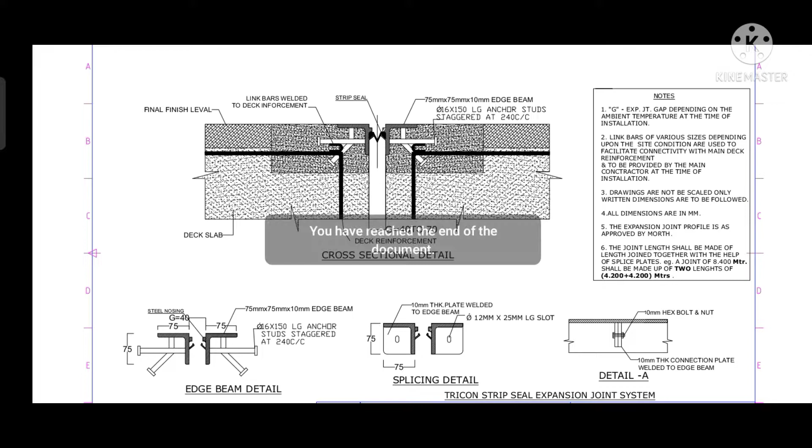In this video, I will show you how to install a strip seal expansion joint on a bridge. This joint must protect the concrete edge from damage caused by vehicle traffic. It also absorbs thermal expansion or thermal contraction.

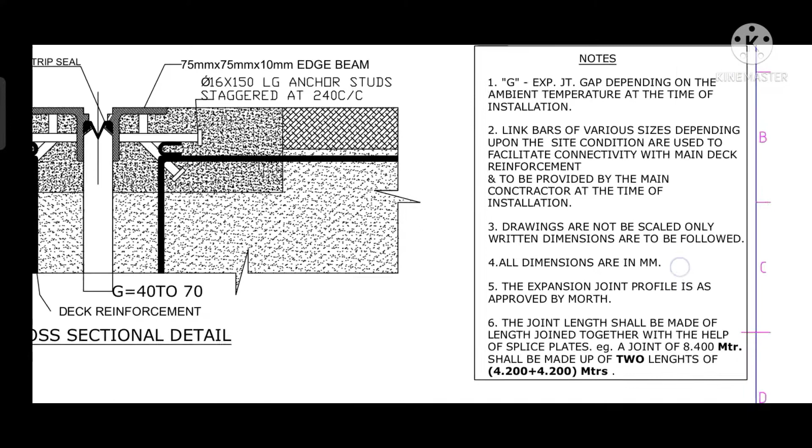First of all, I would like to introduce the drawing. First, the notes. The first note is about the expansion joint gap depending on temperature. When installing this joint, we had between 40 to 70 mm gap, which changes

as per temperature condition on site. The second note is about the link bar, whose size varies depending on the deck slab reinforcement, and the joint link bar distance changes based on site conditions. Other notes include instructions like dimensions, scale, MoRTH code, and others.

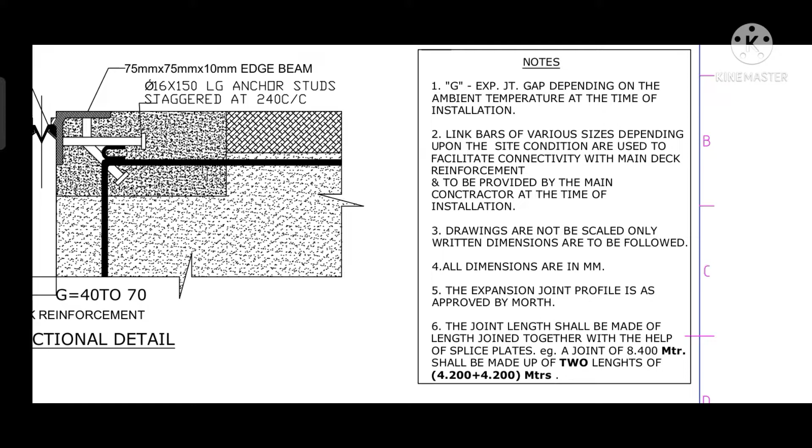After all that, we will see the cross section of the joint, where we can easily see the actual condition on site. Look at this, this is the cross section of the joint.

Right now we can see the gap between the joint is 40 to 70 mm. Also given is the deck's reinforcement position, so already we set the joint. The joint edge beam thickness is 10 mm, and length and width is 75 mm. You can see this in the drawing.

Link bar is welded to deck reinforcement, which will be shown in the middle of the video. Also we can see our joint is 75 mm above the slab level. Look, this is the drawing condition.

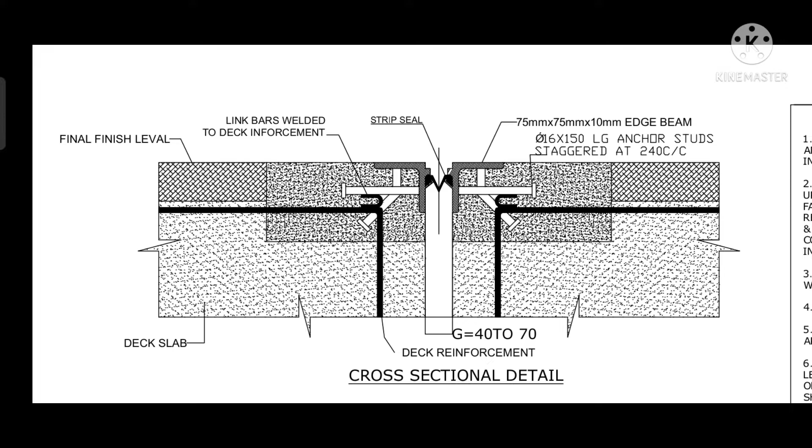After we complete the joint, we put in the strip seal, as given in the drawing. These are the drawing instructions. I will show you on this side how I can put in the joint. Okay, now we see the drawings below of the cross section.

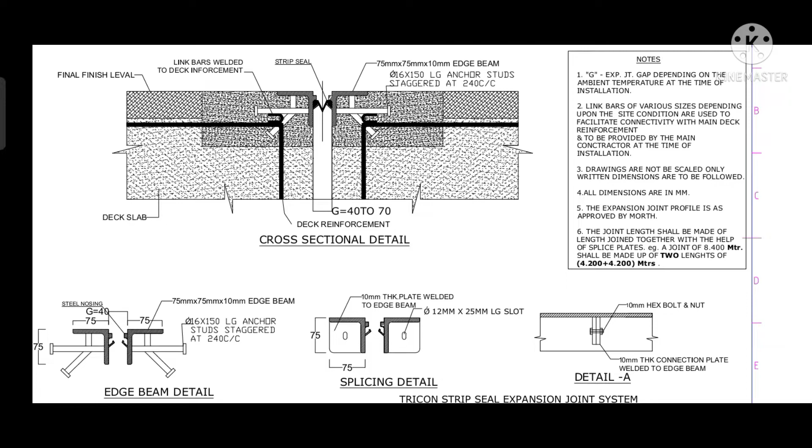Look, this gives the splicing detail, which shows the edge of the beam and the condition of the joint, thickness of the plate, and welded connection, given in the splicing detail. Also detail A is given for the bolted connection between two joints.

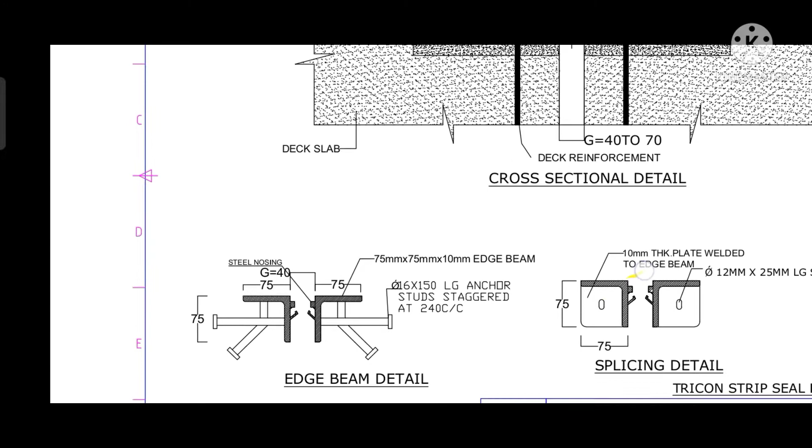Then we can see the edge beam detail. The edge beam detail gives the steel nosing and edge beam dimension, also the anchor size is given in the drawing. Also you can see the stud staggered at 240 mm center-to-center spacing.

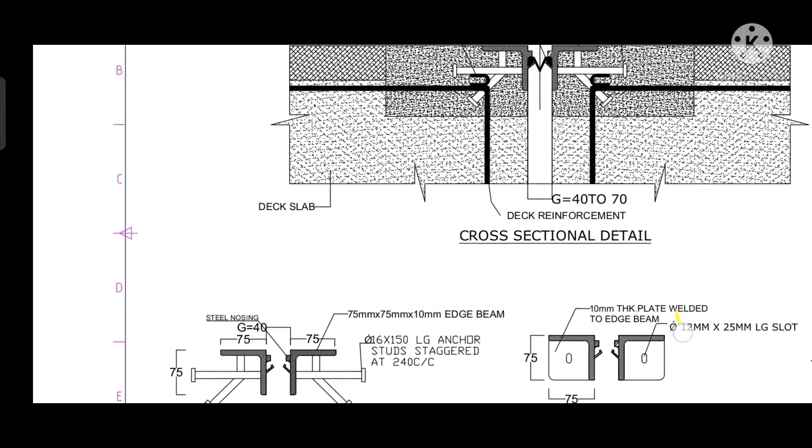Also, in this joint, the total quantity used is 38 numbers. After all, we have the plan and section of the joint, and we can see the length and joining of the two joints by bolted connection, given in this section.

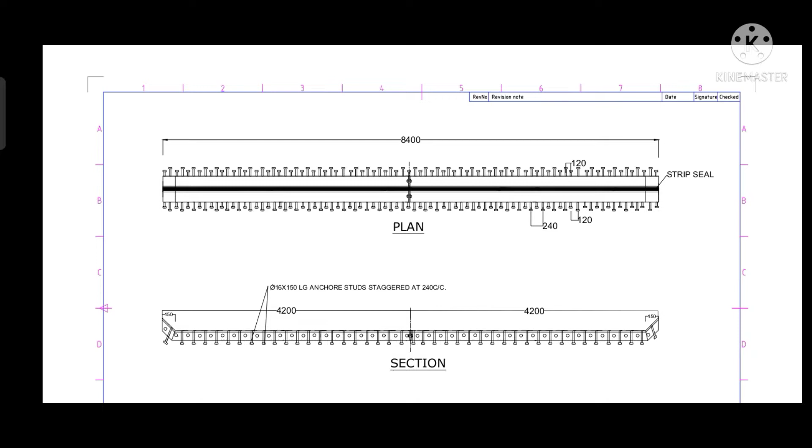Two straight anchor bar spacing is 240 mm and inclined strut anchor bar spacing is 120 mm. Also the dimension of the anchor bar is 16 mm. You can see this in the drawing section below.

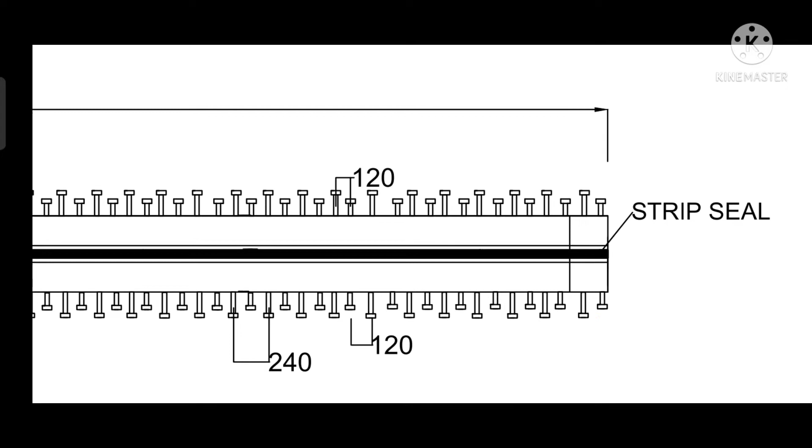Okay, that's it, our theoretical knowledge is over. We will go to the site, which is more interesting. Look, these are our joints, and I will introduce the whole process of it.

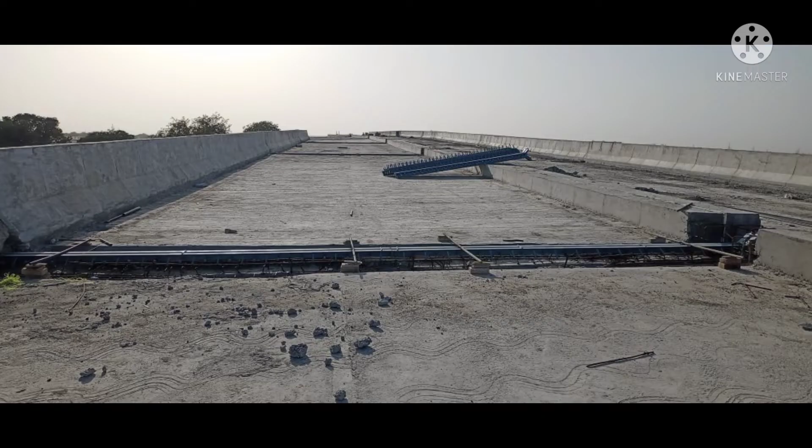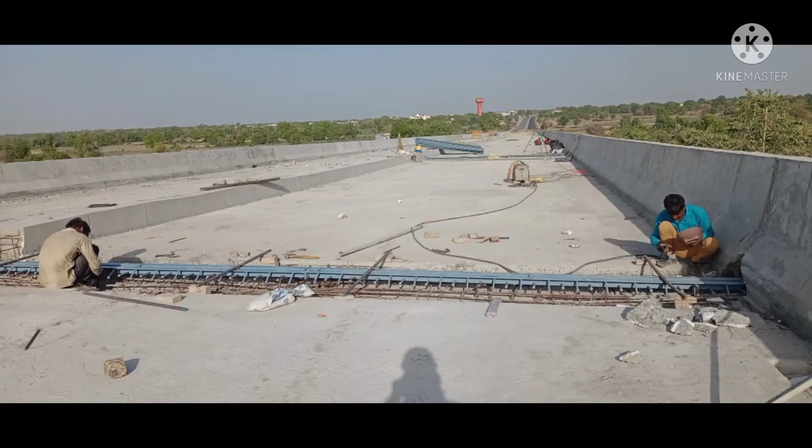So it begins with cleaning both sides of the deck slab. We break the concrete from the slab and deck slab joint portion above the steel, cleaning the steel and also other dust.

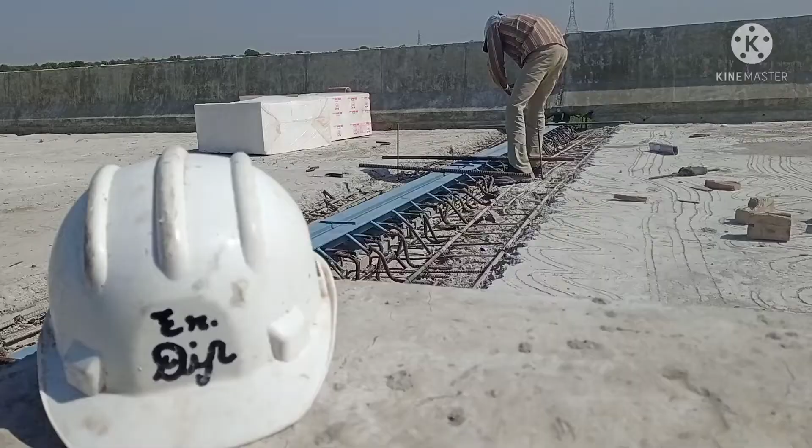After that, we get temporary welded joints, which are steel bar temporary joints. Then after we temporarily joint the steel bar, it is useful for leveling the joint from slab level to 75 mm above the joint level.

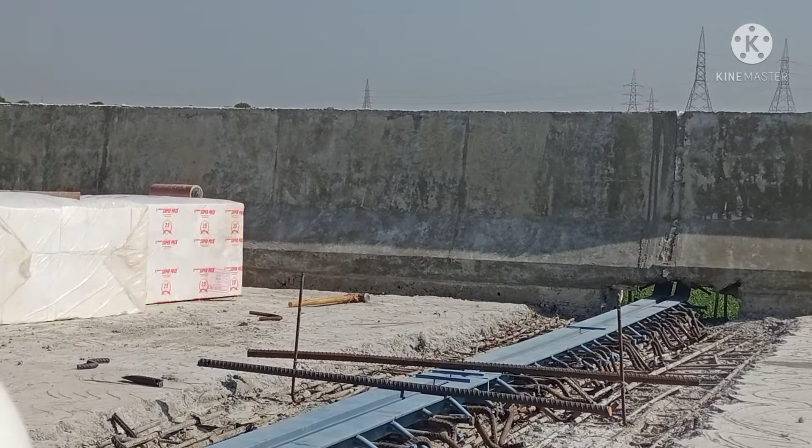We will remove this after completion of the concrete into the joint. I will show you in the last part of the video so you can understand easily. After all, we take the level and set the joint from 75 mm above the slab.

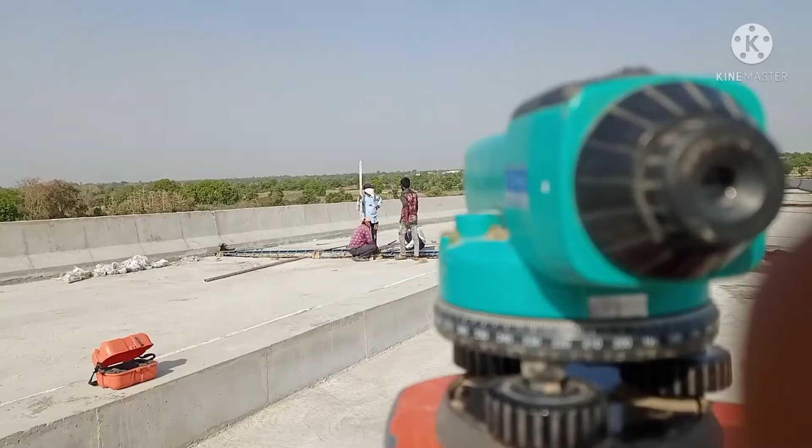Then we get the level using the auto level; you can see we are getting the level from the deck slab to 75 mm above. Then after we do the welding,

so that we can fix it by welding with the link bar. It should be joined with the anchor bar and deck slab bars. You can see we set the joint from the deck slab to 75 mm above, using a 25 mm

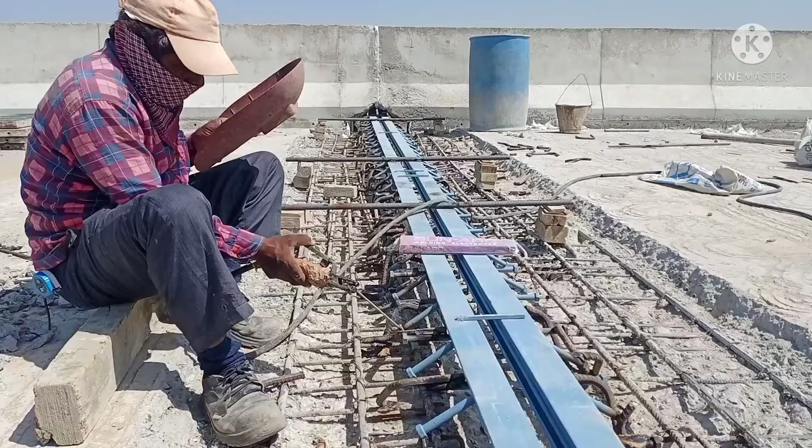bar and wooden packing, which you can see easily in the video. This welding should be proper and strong because this reinforcement directly connects to the deck slab reinforcement, so it requires a proper and strong welded connection between the two reinforcements.

You can see we are welding the anchor bar of the deck slab and joint bar. After completion of the proper welding, we remove the extra bar on the joint and also remove the leveling packing,

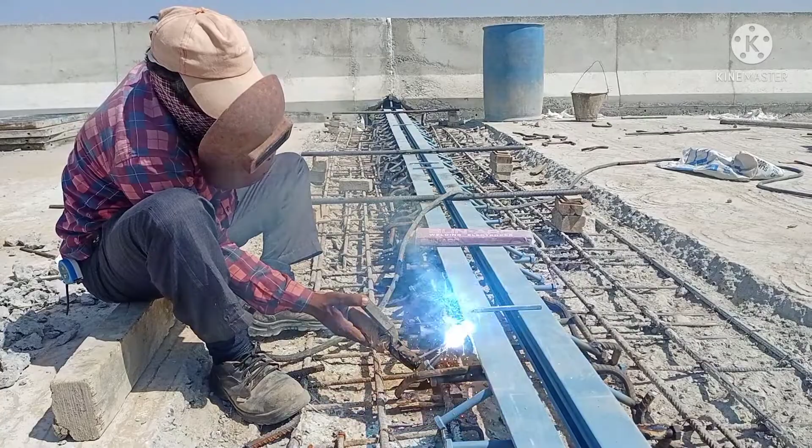and then we set thermocol between the joint of the deck slab and concrete with the joint. We should not let concrete get into the joint, so we put in thermocol and also fix it with adhesive tape so concrete will not come into the joint.

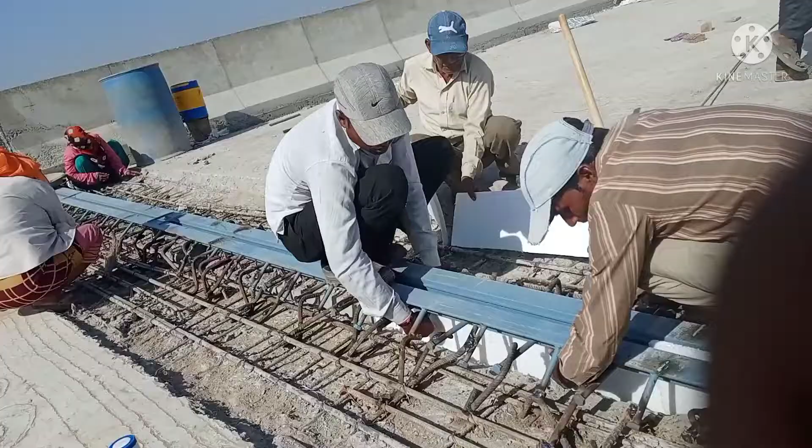You can see we are putting the thermocol between the two joint portions of the deck slab where we are connecting to the slab, so concrete does not go into the joint portion.

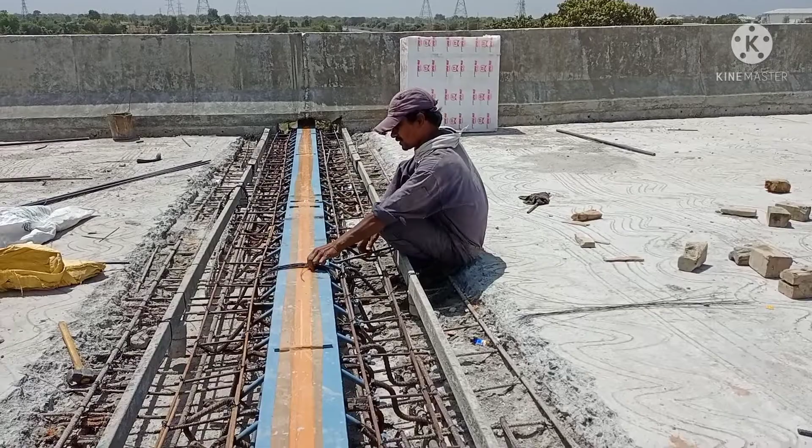After completion, as you can see in the video, we bind the steel bar on both sides of the joint where the deck reinforcement connects. We bind the reinforcement on both sides of the deck slab, as shown in the video.

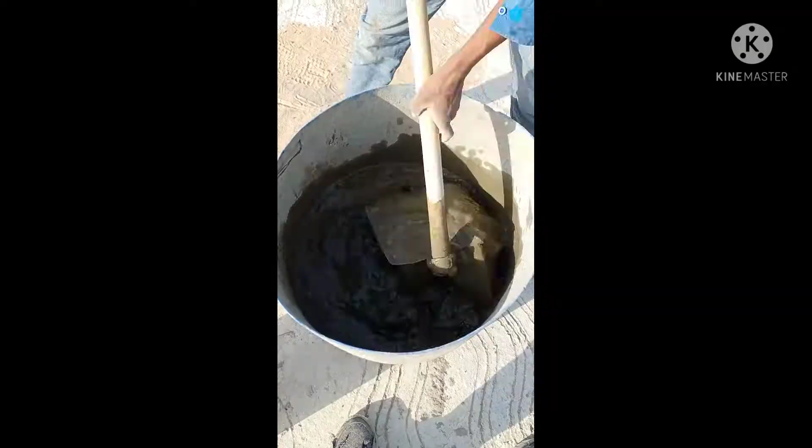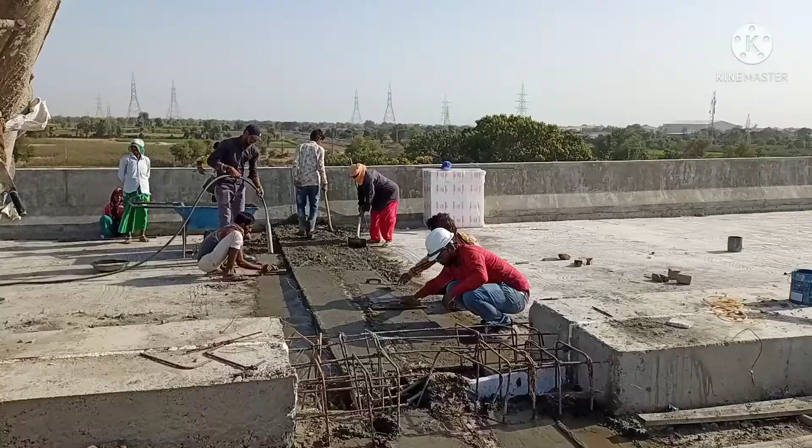We also use cement slurry for a proper joint. After completion of all activities, we can start concrete pouring. Be careful that the concrete should not come into the joint. Thank you for watching the video and gaining knowledge.